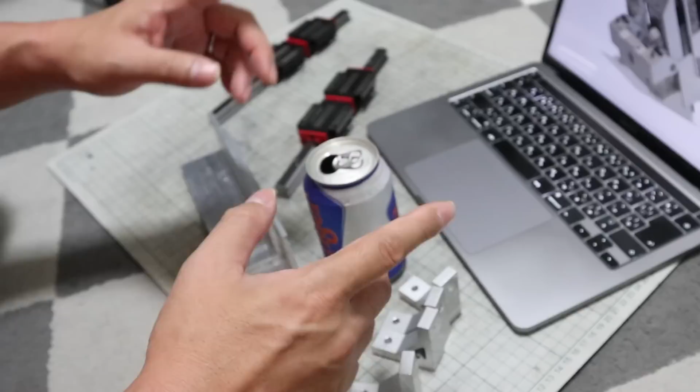Have you ever wanted to make something with large metal parts when enjoying DIY? There are excellent alternatives to metal parts. They are carbon fiber and epoxy granite. They can also be used for hobbies, because they are shaped using a mold. This time I am testing carbon fiber and epoxy granite.

In conclusion, I like the material carbon very much. It is a wonderful material. I have come to this conclusion based on the results of my experiments. Here is what I made on a trial basis. It looks good, doesn't it?

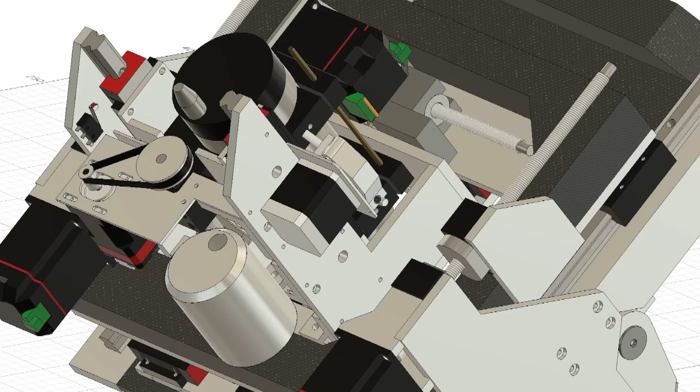The purpose of this test is to make a desktop 5-axis CNC machine frame out of carbon fiber epoxy granite without failure. Since this video is part of a video series on creating a new 5-axis CNC machine, the ultimate goal is to complete a cool machine.

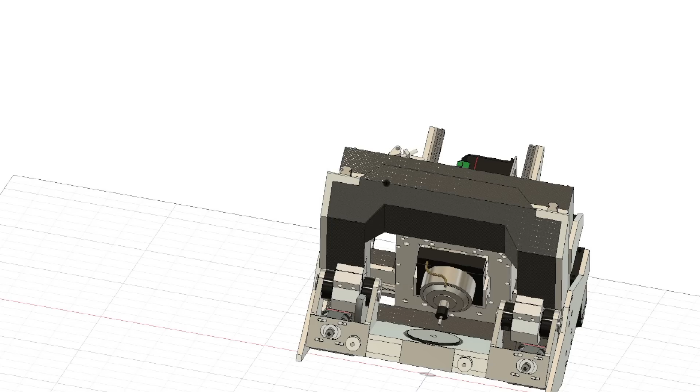I think I am the only person who tries to build a machine base out of carbon fiber and epoxy granite. The first time I do something, I often fail. That is inevitable. But when I make a part that I absolutely do not want to fail, I should test it and be confident that it will be successful before I start.

I will explain why I am making a machine base out of carbon fiber epoxy granite. I think it is very effective to produce a base for a desktop CNC machine at home with carbon fiber and epoxy granite. 1. Carbon weighs only 1/5 of steel and 1/2 of aluminum. Its tensile strength is very high, more than twice that of steel and aluminum. Light and strong materials are attractive for small desktop machines that are carried around.

2. Carbon fiber is a material that can be easily obtained by individuals. There is no difficulty in obtaining the material. 3. Carbon is suitable for DIY hobbyists because it can be molded into any desired shape without sufficient equipment. 4. Epoxy granite is an excellent substitute for cast machine bases. However, its tensile strength is low because of its dependence on epoxy. Carbon fiber compensates for this weakness.

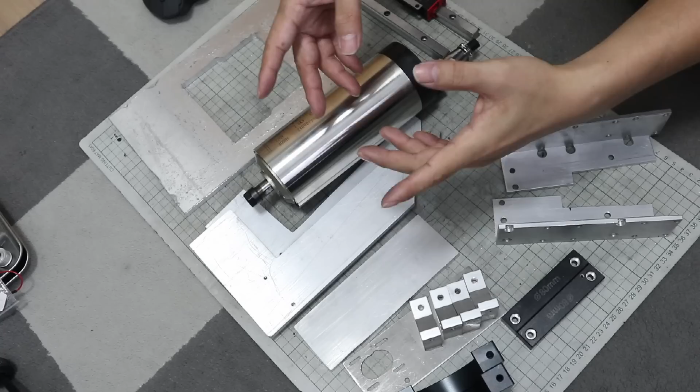5. Last but not least, it really looks good. It looks cool. There are many opinions on whether reinforcing epoxy granite with carbon fiber will improve performance. I believe I won't know until the machine is finally finished and I do some test cuts. But I hope that my trying something new will at least inspire you. These are the reasons why I am making a machine base out of carbon fiber epoxy granite.

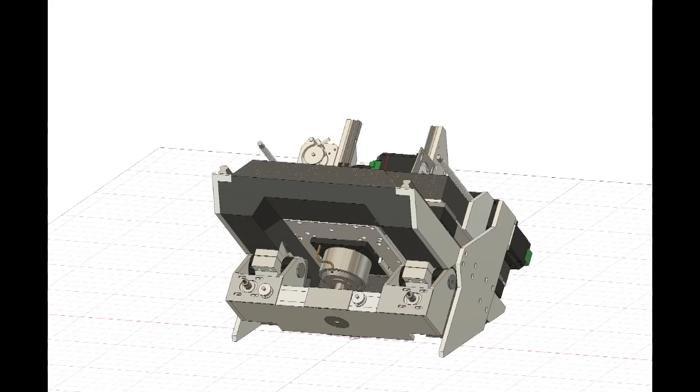There is also information on how to make epoxy granite. However, there is no information for reinforcing epoxy granite with carbon fiber. And since I have very limited equipment available, I have to figure out how to do it myself. And I don't want to fail. That means I need to actually test the method I come up with and find a way to make it work.

The first part I will make with carbon fiber epoxy granite will be this part. If I fail this part, it will hurt my delicate heart. And it will look like this. I want to find the best way to make the best carbon fiber epoxy granite I can.

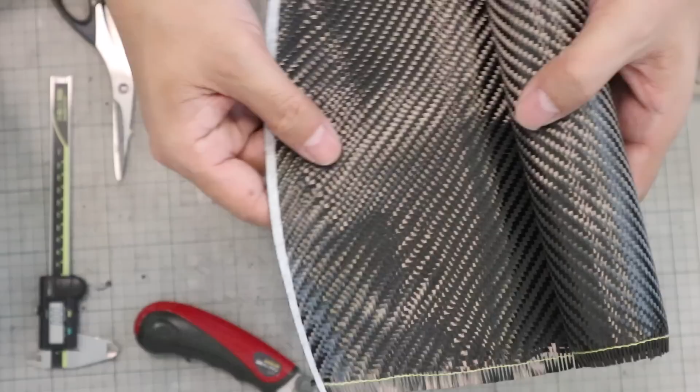This time, I prepared 2 kinds of materials: carbon cloth 30 centimeters wide and 2 meters long, and 6 millimeter chopped carbon chips. I will use epoxy to make these seamless carbon. This is the carbon chips. This amount is 0.1 kilograms. It is as light as a bird's feather. It looks like a stiff needle, but each fiber is finer than a hair.

First, let's do a test with just carbon fiber and epoxy. I will reinforce this Red Bull can with carbon fiber. This can will actually be used as a part for the new 5-axis CNC machine. Later in the video you will see where this part will be used. Maybe some of you already know. Anyway, if I actually try it, I am sure that I will be able to understand many things sensitively. I may discover something new.

When I think of carbon fiber, I think most people think of this cross pattern. It looks cool. The method I thought of is to make a base with chopped carbon fiber first. After that, the carbon fabric is applied. If I just use carbon cloth, there is a possibility that the Red Bull can be seen through the gap. That would not look good. I was also concerned about the strength of the carbon cloth alone. Let's begin.

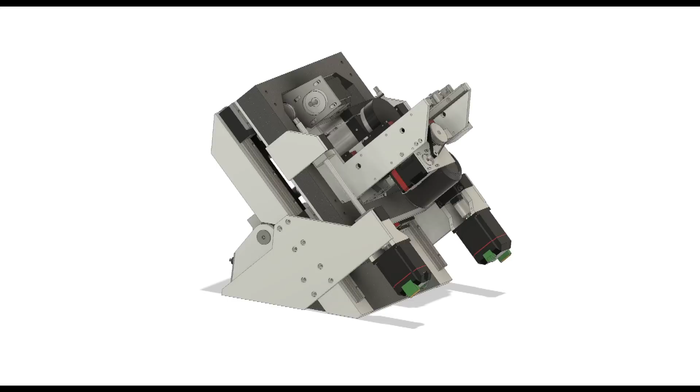However, there is a problem. That is, there will be seams. If there are seams, tensile strength cannot be expected. As a countermeasure, the joints are reinforced with carbon chips and carbon cloth to unify them. I think this is perfect. I have already ordered 1.5 mm carbon plates. I will do the carbon fiber epoxy granite test again. Then I will build the actual 5-axis CNC machine frame.

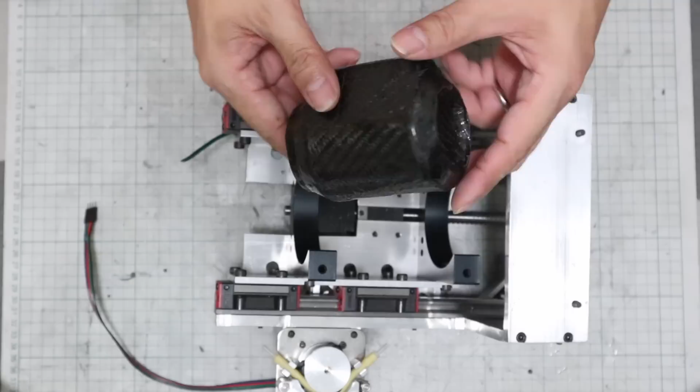Oops, I shouldn't have. I didn't say where I was going to use this. This is the coolant tank. I used a Red Bull can because it was the right size.